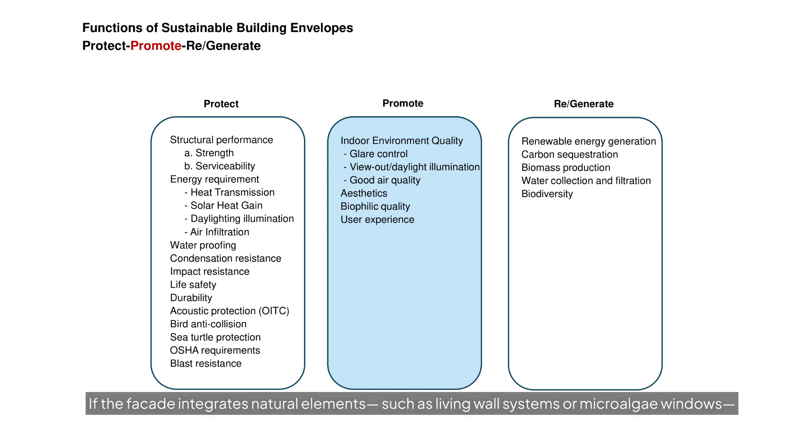Promote focuses on enhancing indoor environmental quality for occupants. A promoting facade maximizes natural daylighting while controlling glare and providing views to the outside. The building enclosure can enable natural ventilation and ensure good air quality, thereby promoting health and well-being. If the facade integrates natural elements, such as living wall systems or microalgae windows, it creates biophilic qualities and aesthetics that improve the user experience.

We will look at a case study and discuss how high-performance facades can make indoor spaces more pleasant and healthier to be in. Regenerate represents the highest function of regenerative facades. This involves the facade actively contributing back to the environment or generating resources for construction and building operations. That can mean generating renewable energy like integrated solar panels or renewable biodiesel feedstock, sequestering carbon through plants' photosynthesis, or even collecting and filtering rainwater through vegetation-integrated facades. A regenerative facade turns the building skin into a producer of resources, not just a consumer.

Note that these functions aren't isolated. A single facade system can offer all three, but conceptually, this breakdown helps ensure we're addressing the triple goals: protecting and promoting the health and well-being of occupants, nature, and the integrity of buildings, while regenerating environmental value.

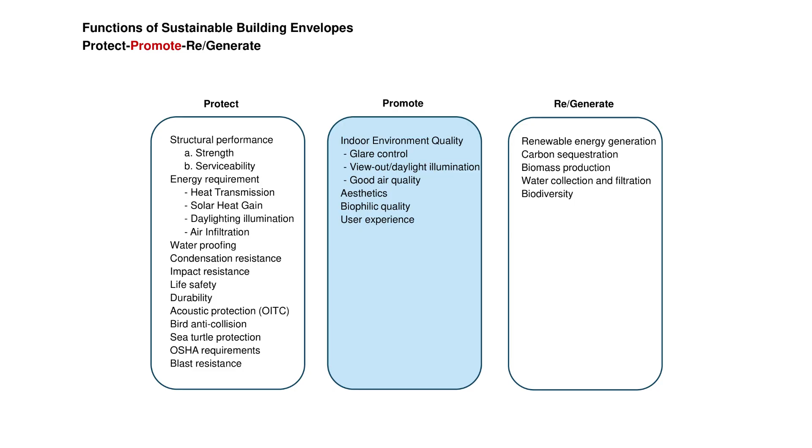As we explore promote, keep in mind that a sustainable facade must excel at providing comfort and delight for people inside while still meeting those protective duties for nature and the built environment.

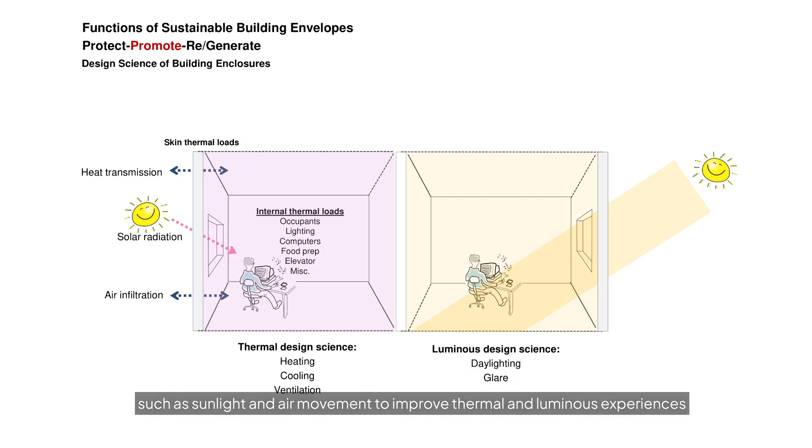This slide illustrates two areas of design science principles in an architectural space: thermal design science on the left and luminous design science on the right. Apertures and opaque walls should be designed to utilize surrounding resources such as sunlight and air movement to improve thermal and luminous experiences while reducing energy consumption for heating, cooling, ventilation, and artificial lighting loads.

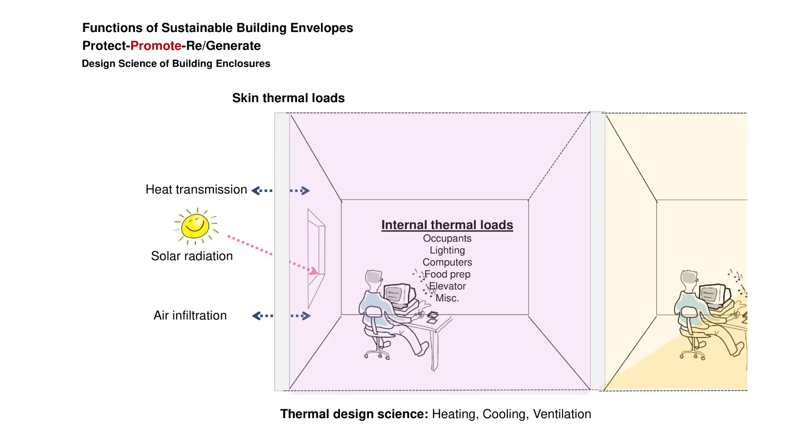Thermal design science refers to how we design the facade for heating, cooling, and ventilation performance. For instance, insulating against heat loss, preventing overheating from sun, and allowing fresh airflow when needed. The phrase skin thermal loads is noted here to emphasize that the building skin carries the burden of these thermal and daylight exchanges.

In this diagram, we see internal thermal loads, things inside the building that generate heat, such as occupants, lighting, computers and equipment, cooking areas, elevators, and other miscellaneous sources. These everyday internal activities and appliances release heat that can warm up the interior.

On the exterior side of the room, we see external factors like solar radiation, sunlight hitting the facade, and air infiltration through outside air leaking in. All of these contributors, internal gains and external gains or losses, sum up to the thermal load that the building skin must manage.

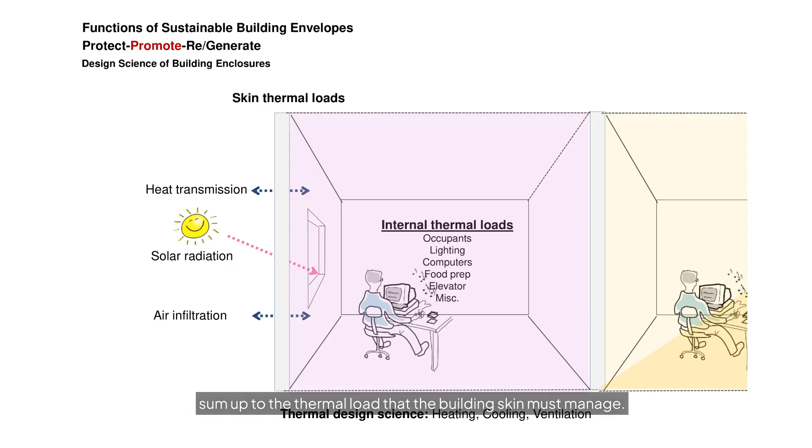Luminous design science refers to designing for daylight and visual comfort, admitting enough natural light to illuminate spaces, but controlling glare and contrast so that the daylight is useful, not bothersome.

The building section illustrates how daylighting could be enhanced through facade design. The size and placement of the aperture affect the quality and quantity of daylight entering the room. Because the sunlight is constantly changing, a good daylighting design aims to bring enough natural light while effectively controlling glare. Essentially, energy is constantly flowing between the outdoor and interior space, and the facade mediates that exchange.

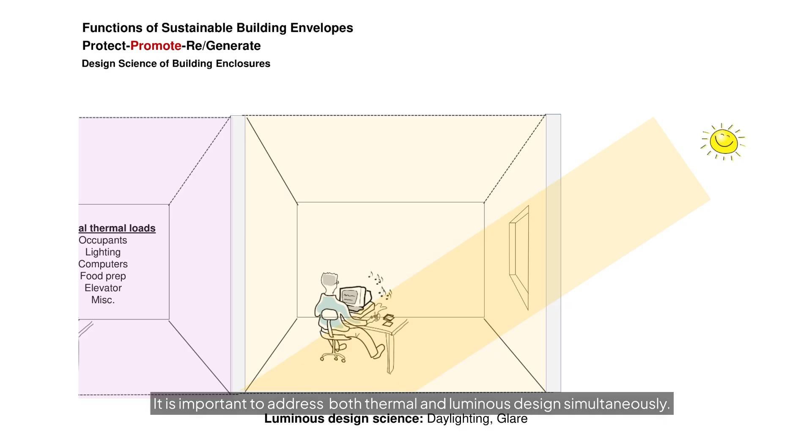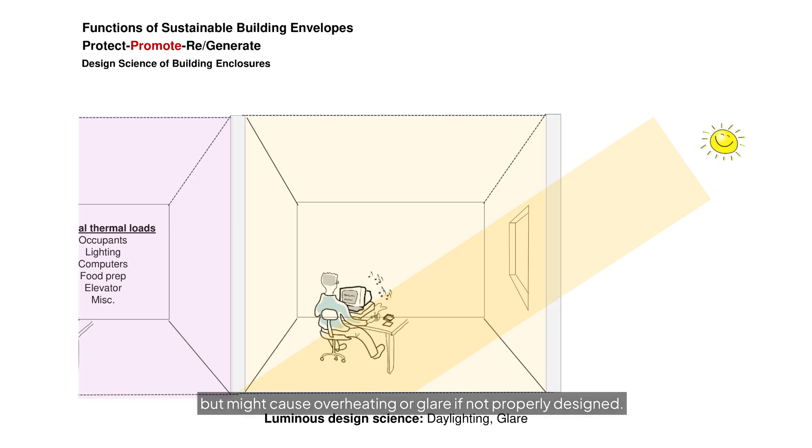It is important to address both thermal and luminous design simultaneously. If you focus only on thermal insulation but ignore daylight, it might end up with a dark, gloomy interior. Conversely, a glass wall gives great daylight and view, but might cause overheating or glare if not properly designed. The takeaway is that a sustainable facade requires an integrated approach, balancing multiple performance aspects to promote a high-quality indoor environment.

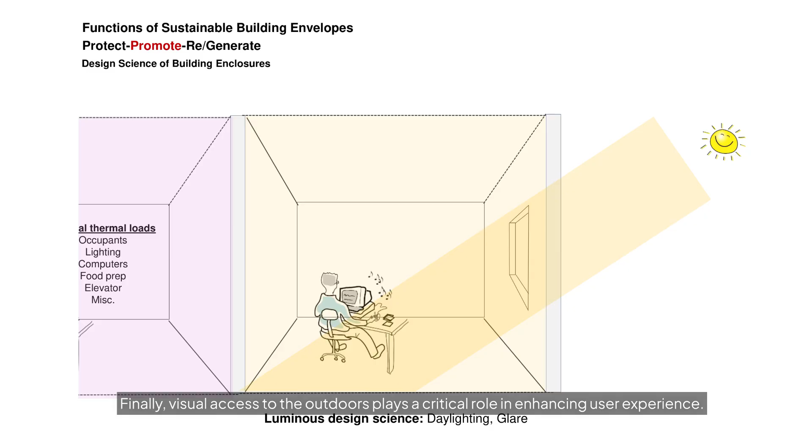Finally, visual access to the outdoors plays a critical role in enhancing user experience. Connections to natural views are positively correlated with increased productivity and reduced stress levels. Clear visual content through apertures should be intentionally designed, not merely as daylighting elements, because the interplay between view, light, space, and surrounding environments significantly contributes to a positive user experience.

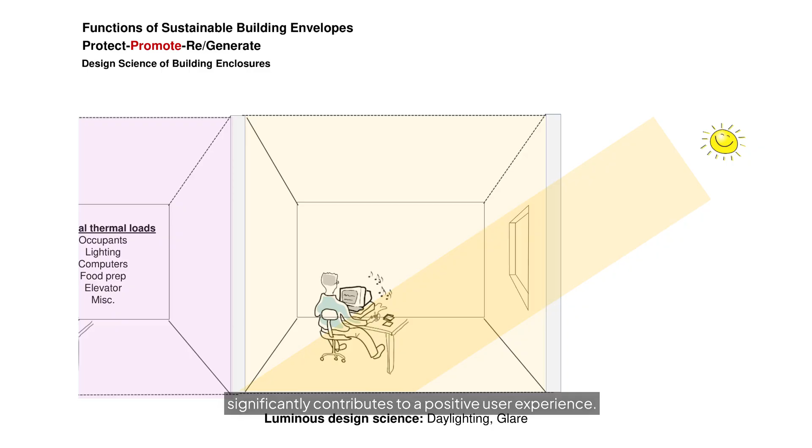The design motif of the Populous Hotel project is the Populus tree. The trunk has a distinctive texture, where the dark oval marks on the bark are the marking of old branches that once grew and later removed. This represents the tree's natural adaptation to its environment. In addition, the horizontal markings are lenticels, which serve as a tree breather, enabling oxygen and carbon dioxide gas exchange and helping internal cells stay alive when leaf photosynthesis is not effective.

This inspires the concept of architectural skin as an environmental exchanger, the architectural surface that mediates between the interior and the outdoors, much like the tree's bark.

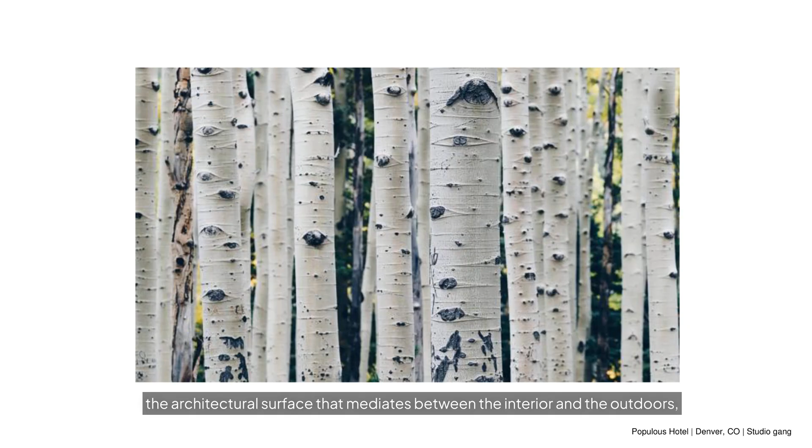In addition to biophilic aesthetic, there is a deliberate facade design strategy to connect inside and outside. At the base of the building, large arching storefront windows are about 30 feet high, and multiple modules create dramatic portals that welcome people into the lobby and restaurant from the street. Each of those vertical scallop modules located in upper floors is actually the width of a single hotel guest room, which shows how the facade's rhythm is directly tied to the hotel's room layout and function.

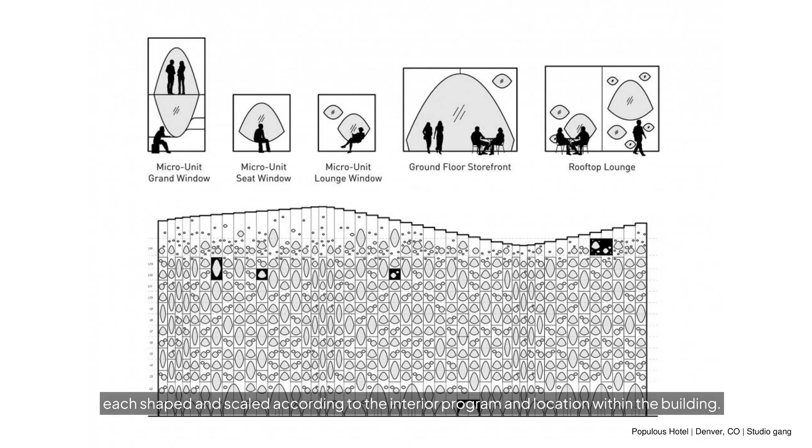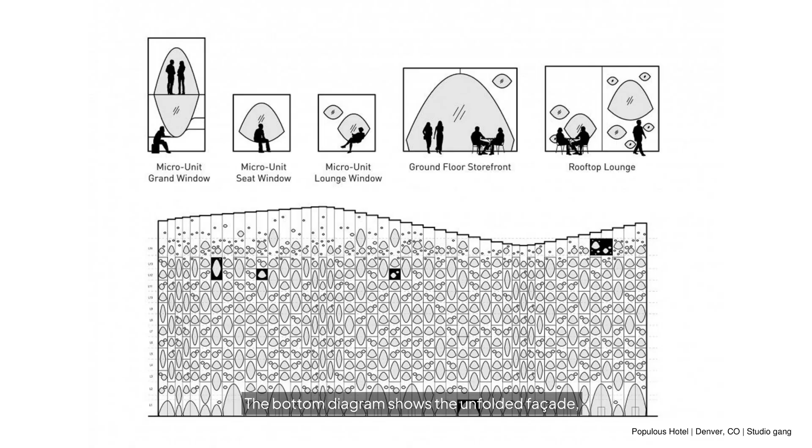This slide shows the elevation and facade typologies for the Populous Hotel facade. The design incorporates a range of modular openings, each shaped and scaled according to the interior program and location within the building. In the top diagram, micro-unit windows serve more private programs, whereas the bigger modules serve public gathering spaces such as storefronts and rooftop restaurants. The bottom diagram shows the unfolded facade, revealing the full variations of different facade typologies.

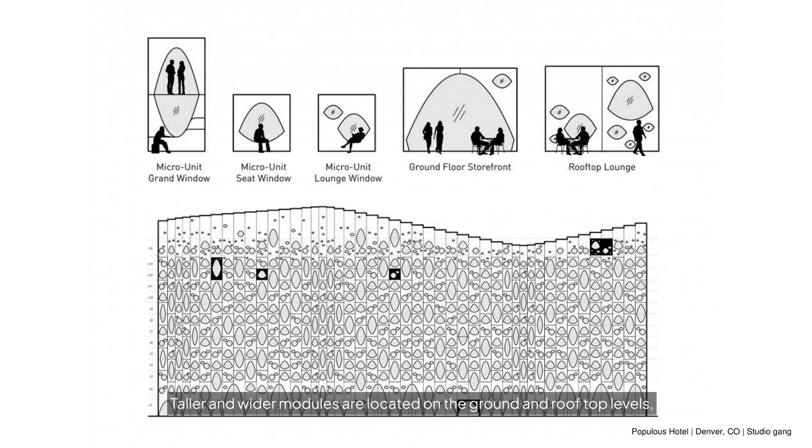Looking at the unfolded facades, we can also identify building programs behind the facade module. Taller and wider modules are located on the ground and rooftop levels, and narrower units enclose the micro-units of the hotel rooms. This unfolded elevation reinforces both functional zoning and visual expression, similar to the Populus tree bark.

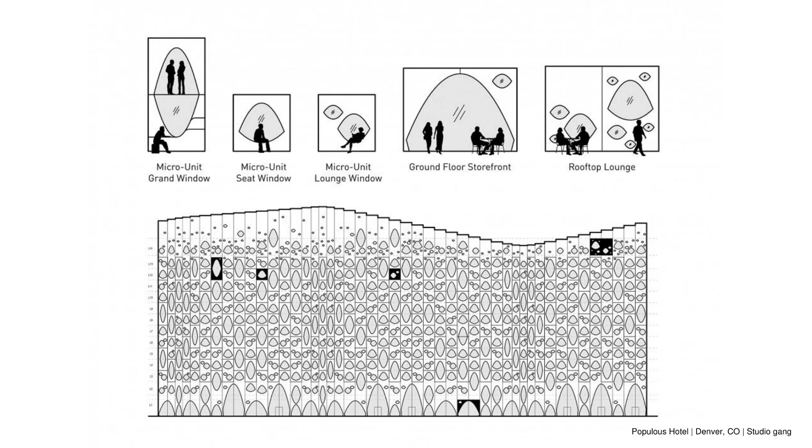In hotel rooms, the windows become more human-scaled and even occupiable. The facade design creates cozy window nooks where guests can sit within the thickness of the facade, almost like little balconies or window seats inside the room. Curling up in the window bay and having an immersive view of downtown Denver and the Rocky Mountains provides a special experience for guests.

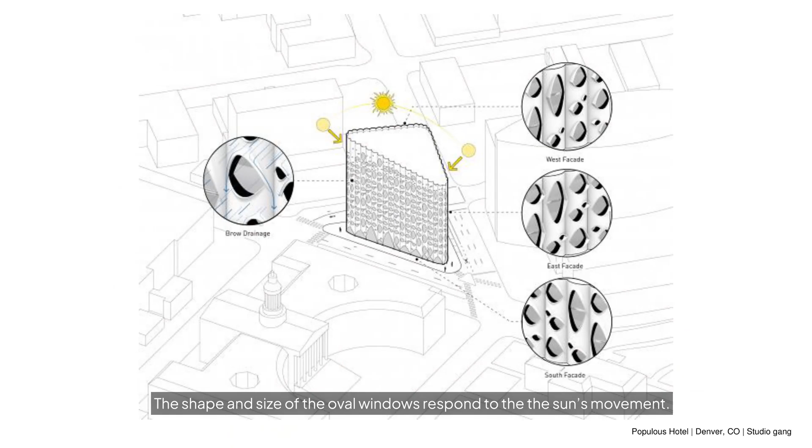The shape and size of the oval windows respond to the sun's movement. The eastern and western apertures integrate protruding shading devices or extended eaves along the perimeter, blocking the sunrise and sunset light and reducing glare for the rooms. The protruding shading device along the top of the southern windows blocks the high-angle sun. They also help channel rainwater away from the window openings and divert it to a certain collecting location.

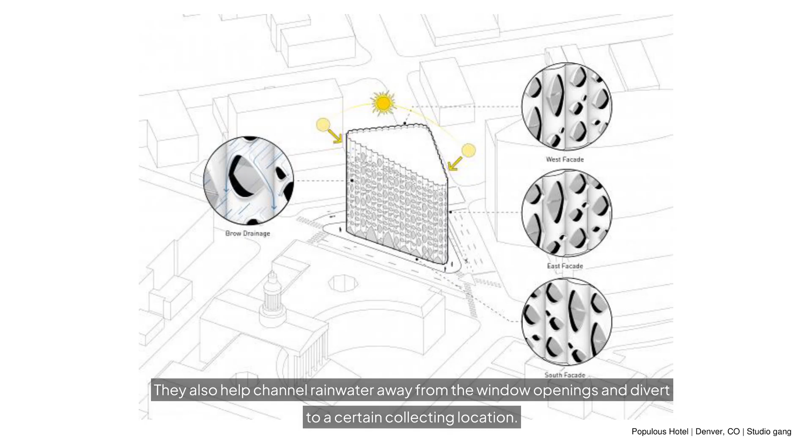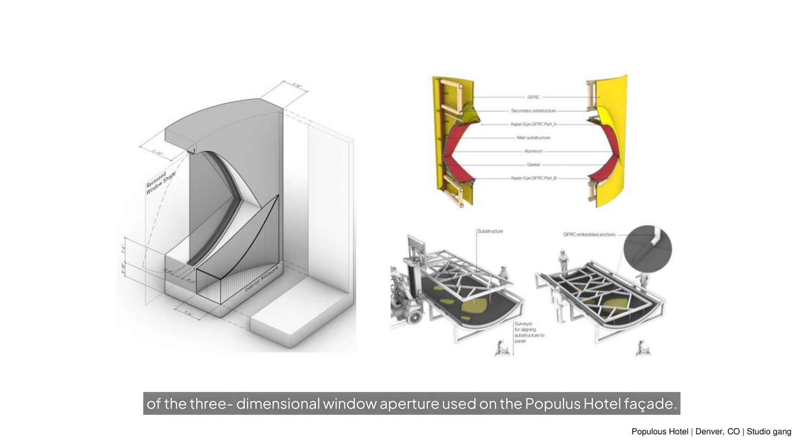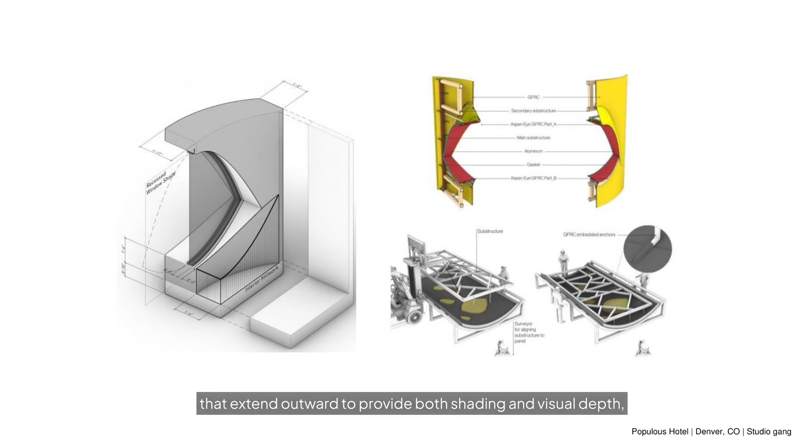This slide breaks down the construction and assembly of the three-dimensional window aperture used on the Populus hotel facade. Unlike flat window systems, these apertures are sculpted volumes, formed by a structural frame and curved cladding panels that extend outward to provide both shading and visual depth, and project inward to create a seating, occupiable space.

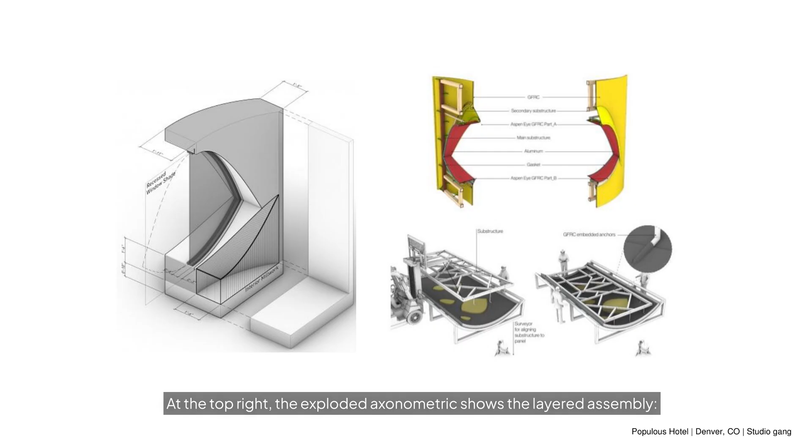On the left, you see the geometry of a single unit. The recess creates a sculpted window nook that modulates sunlight, offers privacy, and channels rainwater away from the opening. At the top right, the exploded axonometric shows the layered assembly, a main and secondary substructure supporting a cast GFRC, glass fiber reinforced concrete panel system, labeled here as Aspen Eye panels, bolted to the main frame. This GFRC cladding wraps around the aperture, giving it its characteristic form and texture.

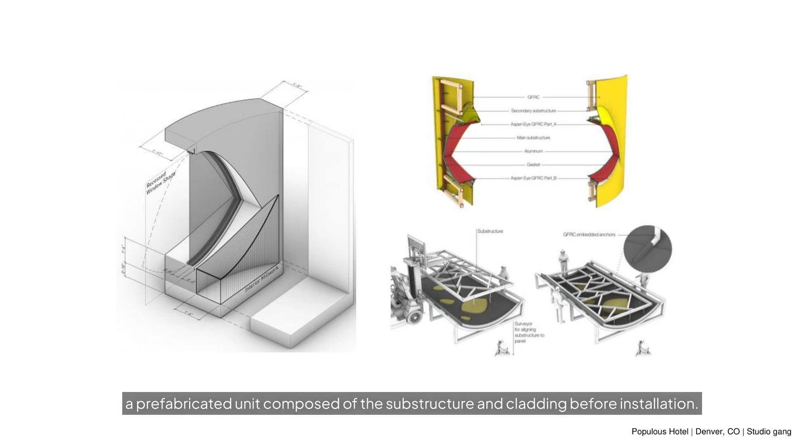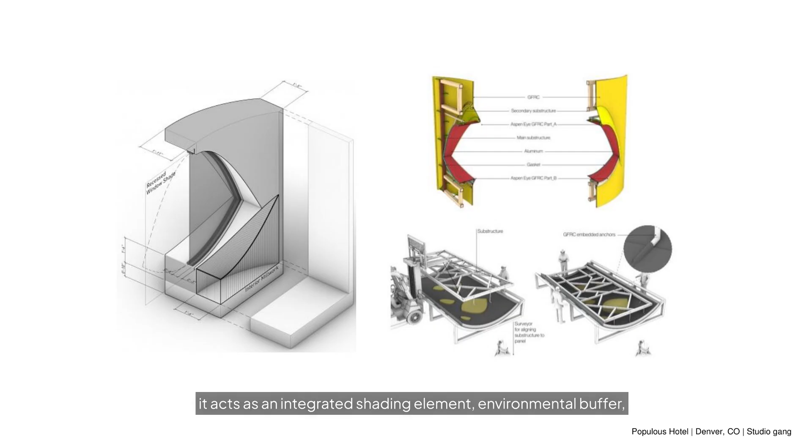At the bottom right, the fabrication diagrams illustrate a prefabricated unit composed of the substructure and cladding before installation. This prefabricated system ensures accuracy in geometry and quality control during assembly. Overall, the design of the aperture is not just aesthetic, it acts as an integrated shading element, environmental buffer, occupiable threshold, and a tactile, expressive skin that contributes to the identity of the building.

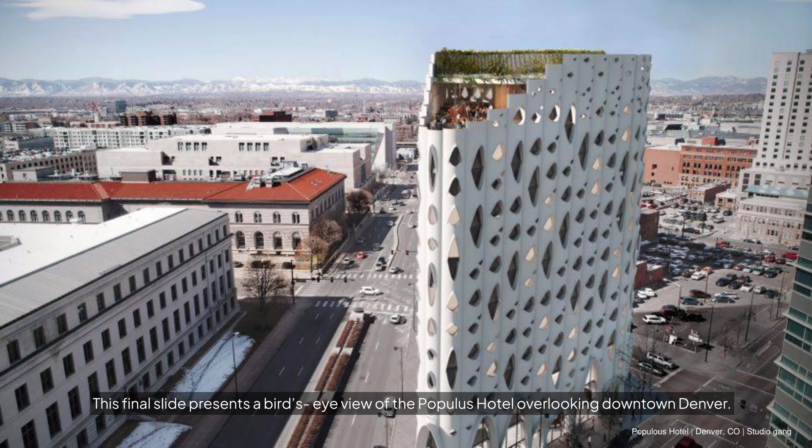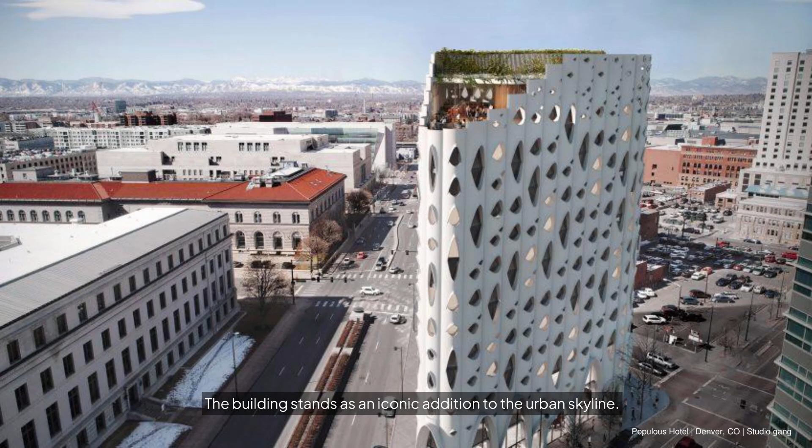This final slide presents a bird's-eye view of the Populus Hotel overlooking downtown Denver. The Populus Hotel's rooftop offers panoramic views of Denver. This space not only provides leisure opportunities, but also integrates green design elements. The building stands as an iconic addition to the urban skyline. Its sculpted facade was inspired by Colorado's natural environment, specifically the Populus tree. It's a building designed not just to be seen, but to perform, to inspire, and to connect people, architecture, and nature.